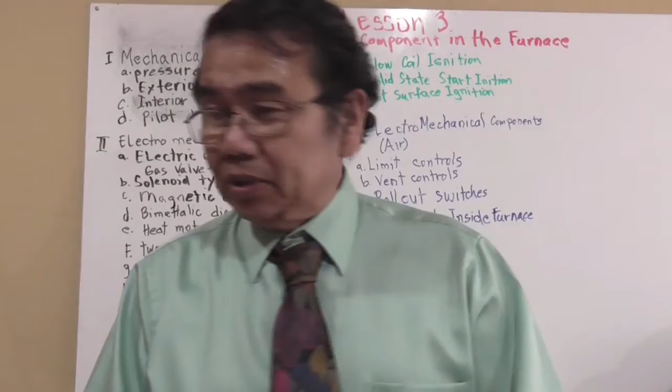Mechanical components: we'll have the pressure regulator, this one right here. Pressure regulator decreases the gas pressure supplied from the utility meter from about 7 inches of water column to 3.5 inches of water column, maintaining a constant gas pressure at the furnace.

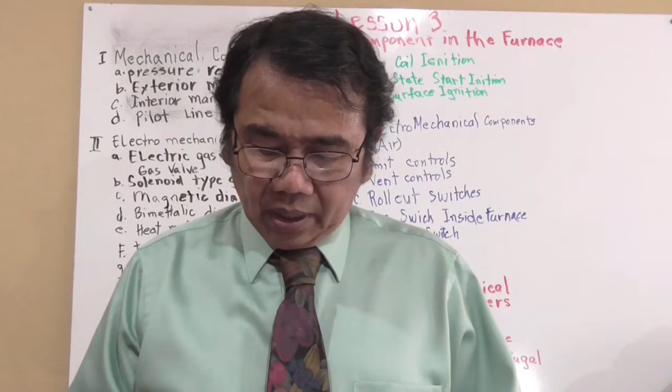Older heating systems had a separate pressure regulator. Newer heating systems have a combination gas valve which has the pressure regulator in one housing with the main valve.

A vent opening is needed on the regulator to assure atmospheric pressure on top of the diaphragm. On older pressure regulators, there was a copper tube that runs from the vent opening to the pilot burner. If the diaphragm was ruptured, the gas would burn off at the pilot.

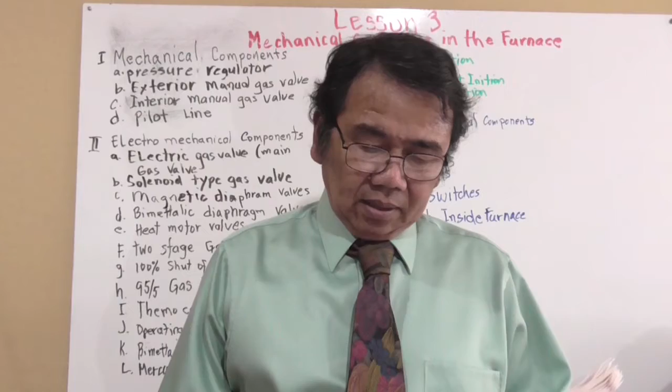On newer pressure regulators, a leak limiting orifice is incorporated in the vent. To change the pressure setting on the regulator, an adjustment screw is used to set the pressure. To increase the pressure, turn the adjustment screw clockwise. To decrease the pressure, turn it counterclockwise.

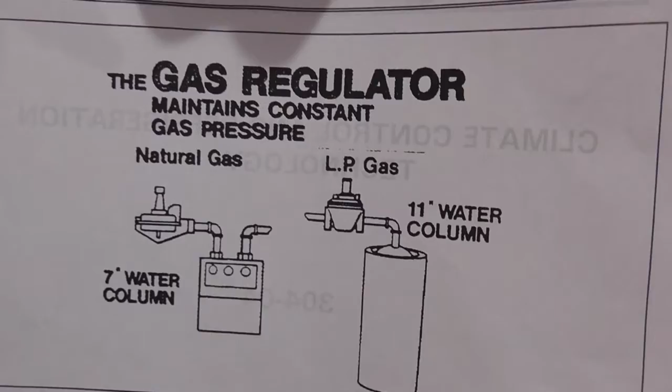I can show you a picture here. One is a gas valve, one is for natural gas and one is for LP gas. This one right here, and this one right here.

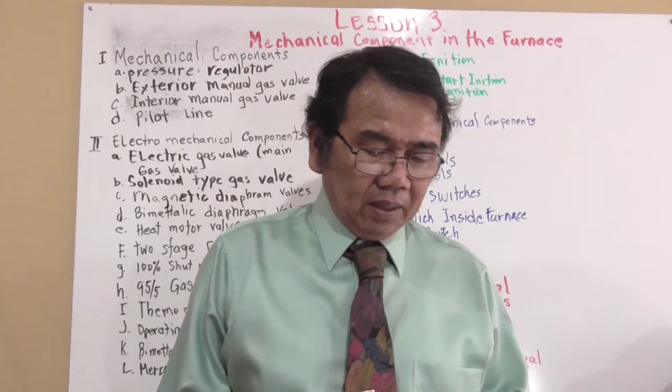Now we'll be talking about the external manual gas valve, also known as the gas safety cock. This valve is open when the handle is parallel to the length of the pipe and closed when the handle is perpendicular to the length of the pipe. Manual gas valves should not be used to regulate the gas supply located outside the furnace cabinet.

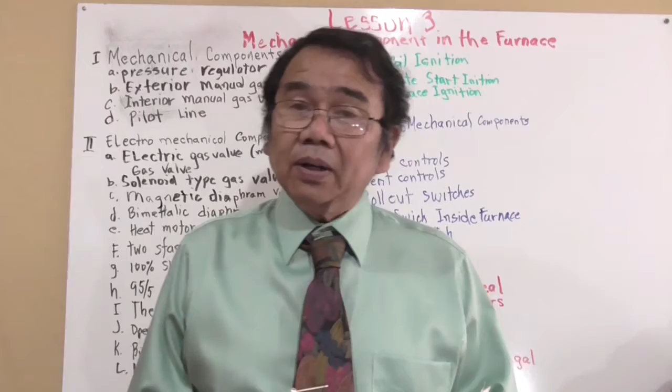The next one we're going to talk about is the interior manual gas valve. Interior manual gas valves - older systems have two manual gas valves. These valves were in addition to the exterior manual gas valve.

The A-cock was used to turn the main gas supply on and off to the main gas valve. The B-cock was used to turn pilot gas supply on and off to the pilot.

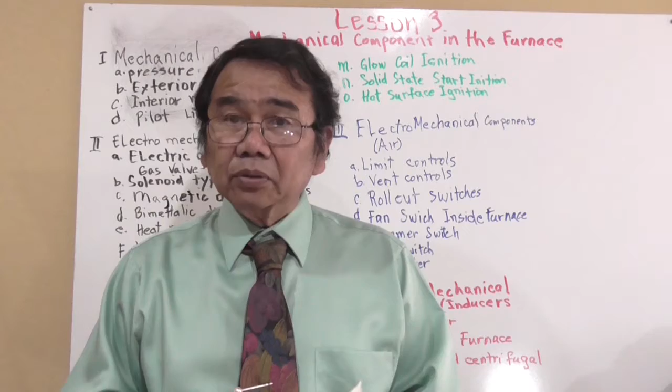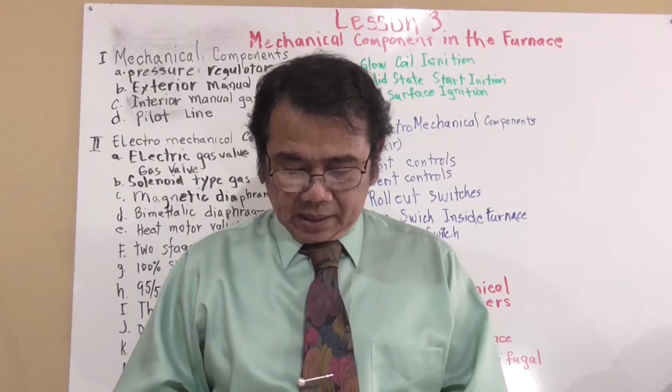One of the several systems is known as 95-5, pilot gas on even if pilot is not lit. That means pilot gas on even if pilot not lit. Pilot auto relight also uses the 95-5 system.

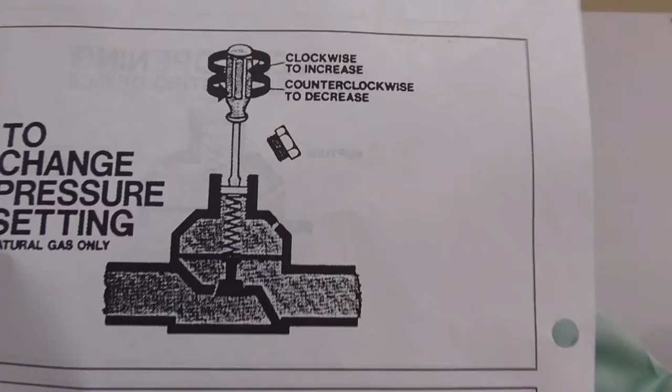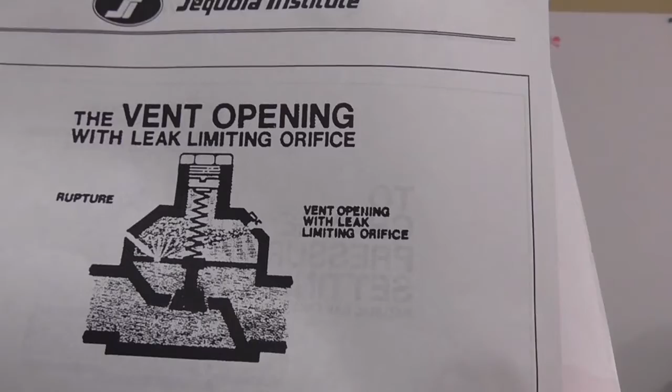In here is a diagram of how you adjust the pressure on the regulator. You've got a screwdriver on top, and then the valve, and then here the gas valve. On the other side is another diagram which shows the adjusting nut on top. Then you have this diagram here.

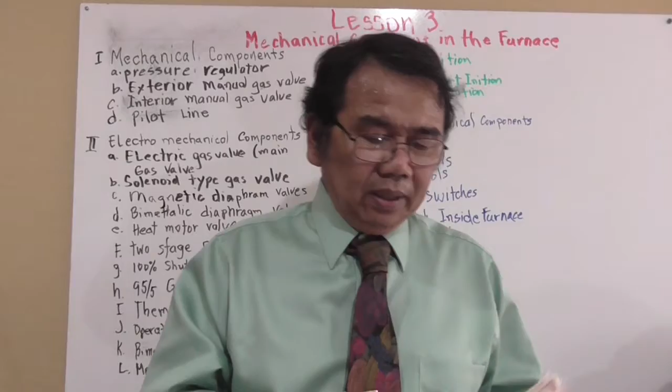Belt drive type is a V belt with adjustable or fixed motor pulley and fixed blower pulley. Belt drive speed adjustment is usually by varying the adjustable motor pulley diameter. That means you determine the pulley diameter of the two pulleys, and then you can change the speed by

calculating that difference. To increase blower speed, close the motor pulley. To decrease the speed, open the motor pulley. Found on many industrial, commercial, and older residential units.

Whenever changing blower speed, be sure to check the amperage draw of the motor. Compare your readings with the motor nameplate amperage rating. This will prevent overloading of the motor.

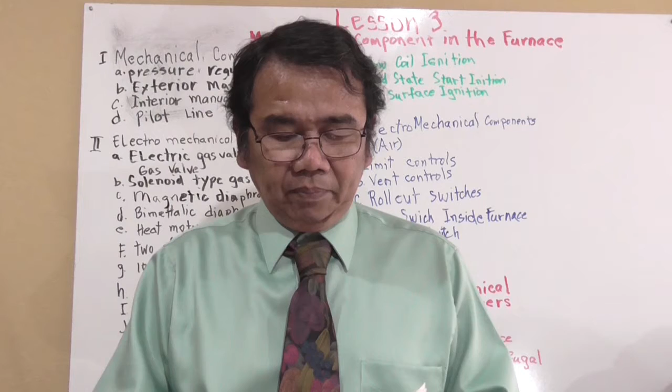And then we have the pilot line. The pilot line is the supply tubing that carries gas to the pilot burner. Tubing is usually 1/4 inch aluminum and is connected with brass compression fittings on both ends.

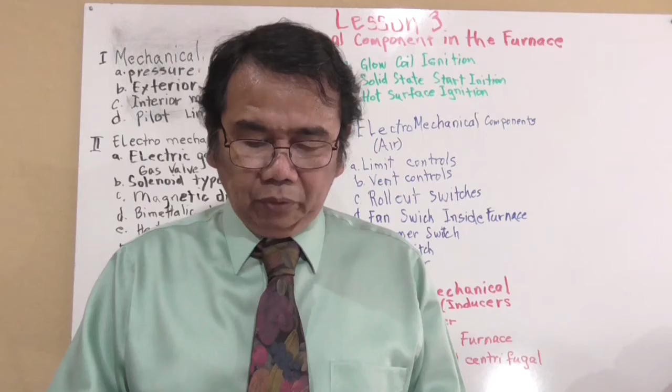Larger systems may use larger pilot lines. Note, use care to avoid cross-threading either the pilot burner or the valve when installing new pilot tubing.

Now we're gonna talk about the electromechanical components. This one right here - first one we talk about will be the electric gas valve. Electric gas valve, which is called the main valve.

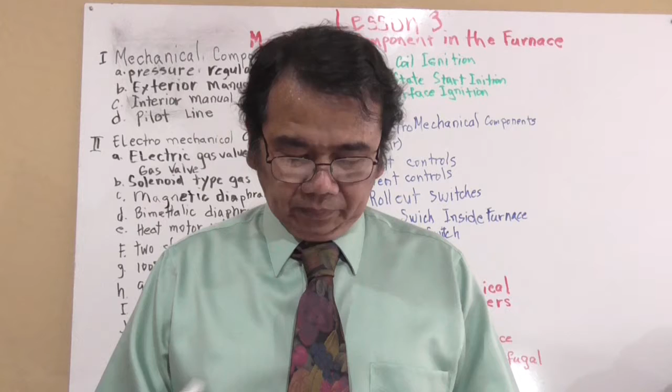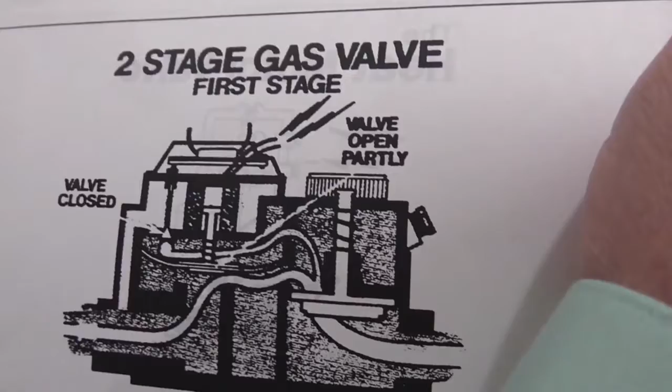This is the way you're going to reset the pilot.

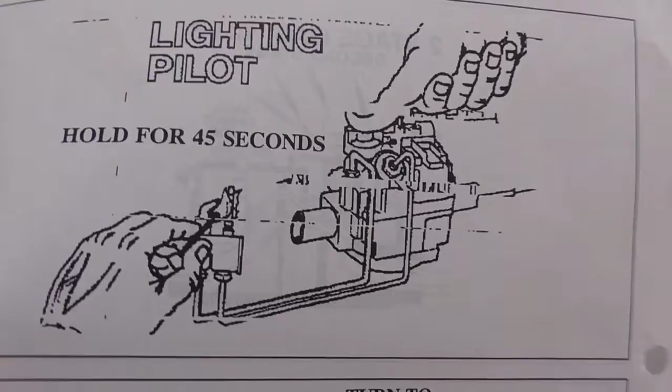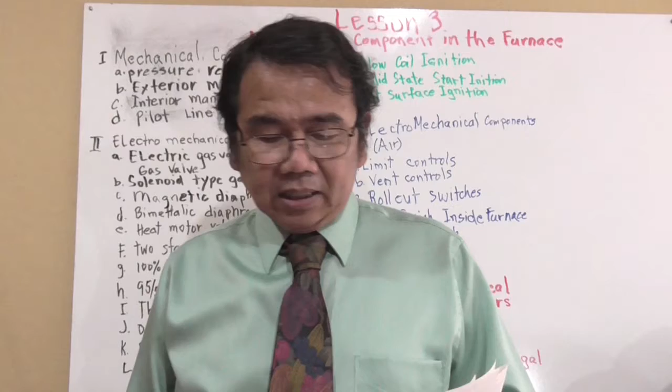Electromechanical components, magnetic diaphragm valves. Two forces must be present to open the magnetic diaphragm valve. The primary force of operation is gas pressure. The secondary force is magnetic - the secondary pressure force is magnetism. When the valve is energized on the call for heat, gas pressure and magnetism are both used to open the valve. Neither force can operate the valve without the other. I showed the diagram for that before.

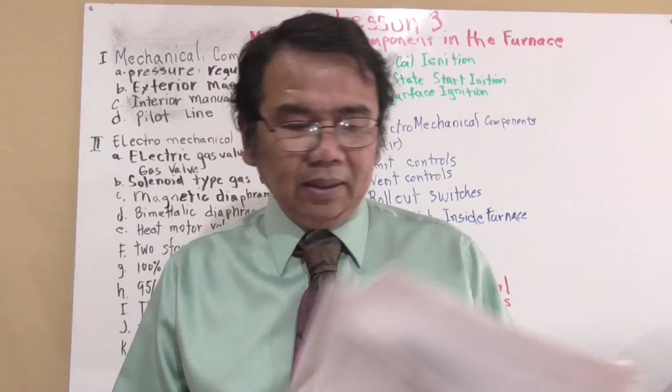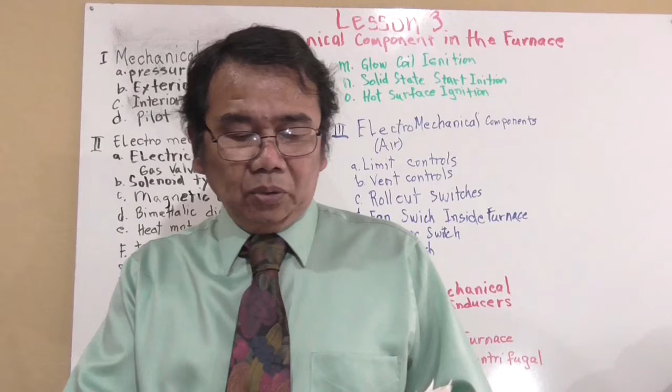Then we've got the other one, bimetal diaphragm valves. A bimetal diaphragm valve is very similar to the magnetic diaphragm valve, except that it uses heat to operate the valve instead of magnetism. A little electric heater, normally 24 volts, is placed on or near the bimetal. When the heater on the bimetal strip is energized, the bimetal will warp and open the valve.

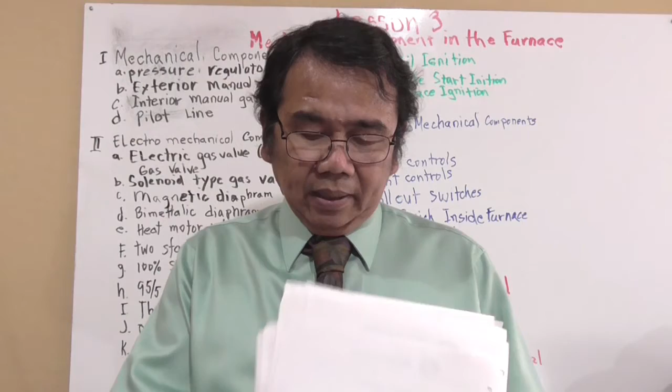This is saying the bimetal works on this principle: you've got a metal inside, and when it's heated up, it bends.

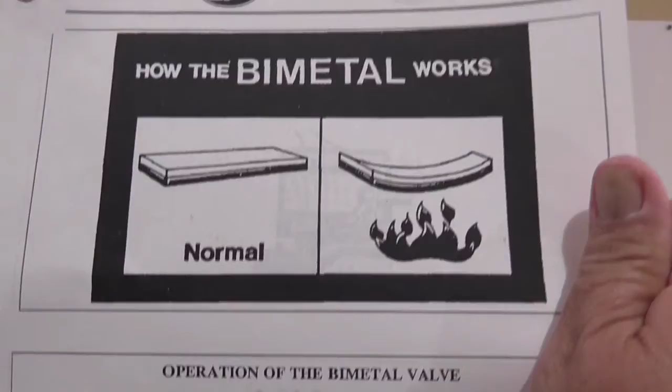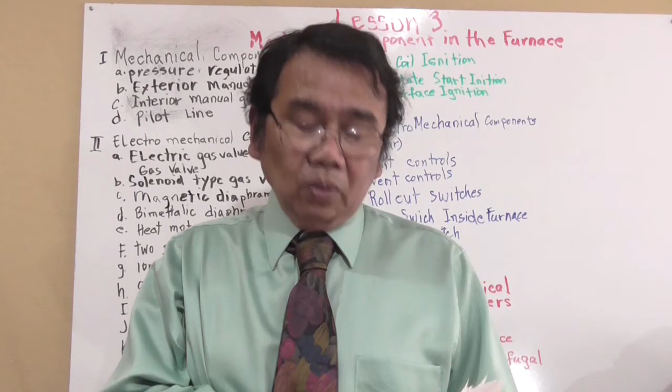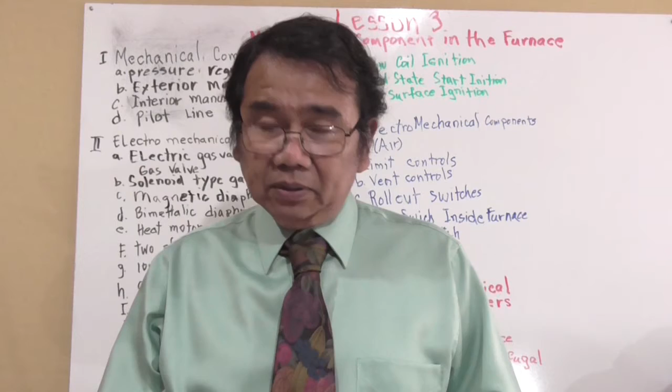When the heater on the bimetal strip is energized, the bimetal will warp and open the valve. When the heater is de-energized, the bimetal will cool and close the valve, because it takes time for the bimetal to heat up and cool down before the valve is operated. There will be a time delay in a bimetal type of valve. Remember, time delay - the delay in a bimetal valve is usually about 15 to 20 seconds.

One disadvantage of the time delay style valves is if there is a delayed ignition, there is no way to electrically shut down the main valve immediately. If delayed ignition is about to occur, shut down the gas safety cock outside the furnace cabinet.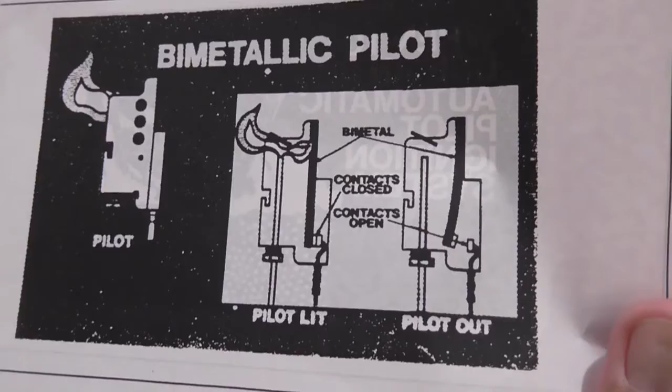This is the pilot diagram that I have here. That's what the pilot looks like.

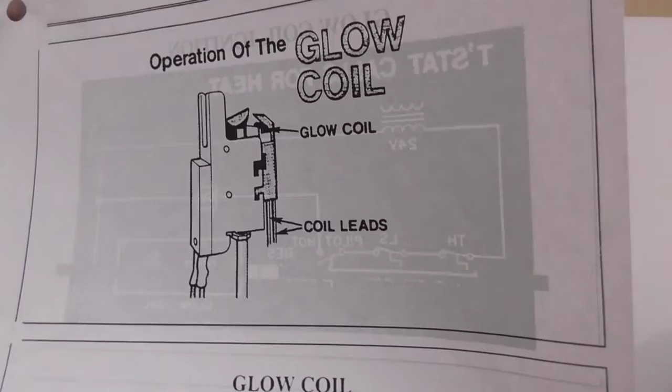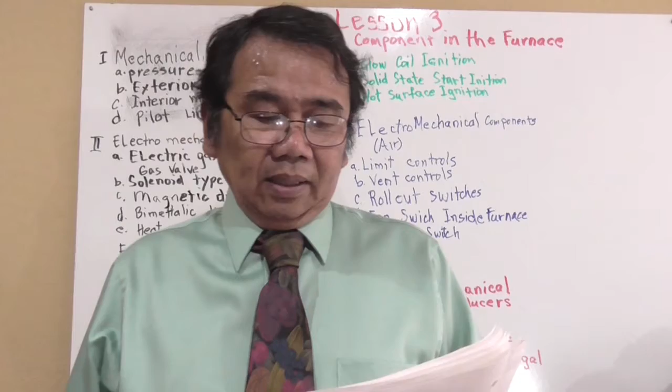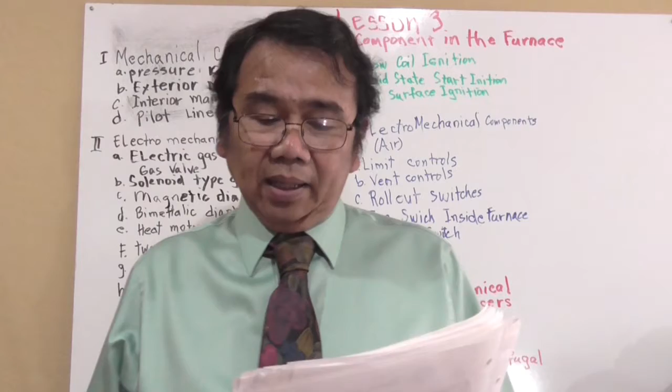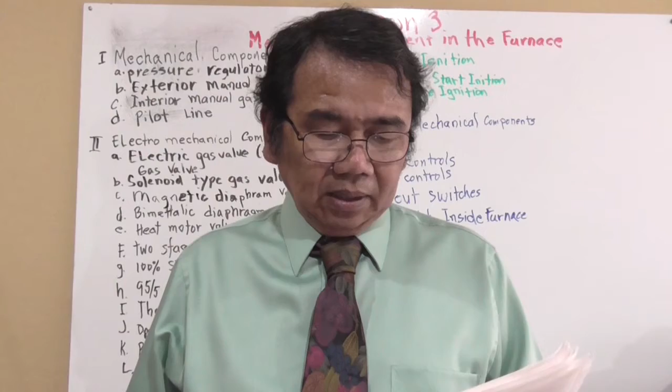Heat motor valve: the heat motor valve uses an electric heating coil to heat and move an expandable rod. The movement of the rod provides the force necessary to operate the valve. When the valve is energized, gas begins to flow through the valve in about 20 seconds. When the valve is de-energized, there is a delay of approximately 40 seconds in closing. Due to this 40 second delay time to close the valve once de-energized, this type of valve is very dangerous if there is a delayed ignition problem present.

If delayed ignition is about to occur, shut off the gas safety cock outside the furnace.

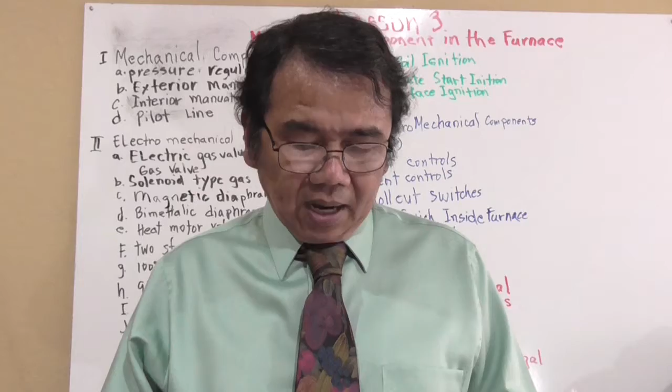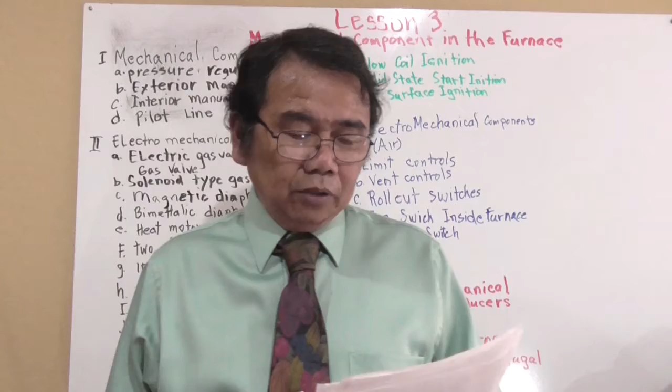And then we've got the two-stage gas valve. When two-stage heating is needed, a two-stage gas valve is used, normally on commercial units. When the first stage is energized, the valve opens to the preset low fire position, usually 50% of the normal input. The call for second stage shifts the valve from low fire to high fire at 100% input. Because of the bimetal operation, there is a 10 to 20 second delay between first and second stage heating.

This is not considered a dangerous valve, even though there's a time delay, because delayed ignition is not possible since the first stage is already burning.

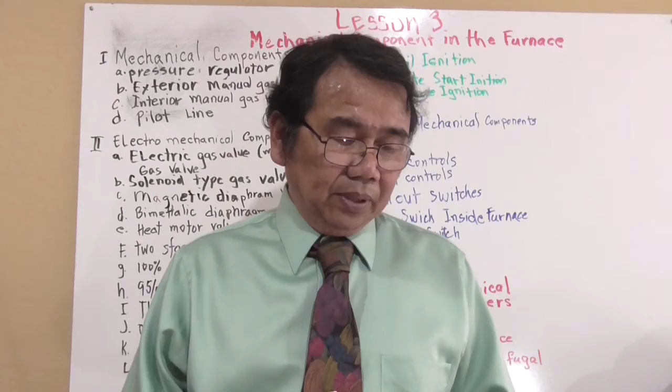Okay, and then we got the 100% shut-off automatic gas valve. This is the 100% shut-off automatic gas valve. Okay, the 100% valve stops gas flow to the burners and pilot in case the pilot goes out. That means the 100% valve stops all gas flow to the burner and pilot in case the pilot goes out. 100% shut-off gas valves are required on all

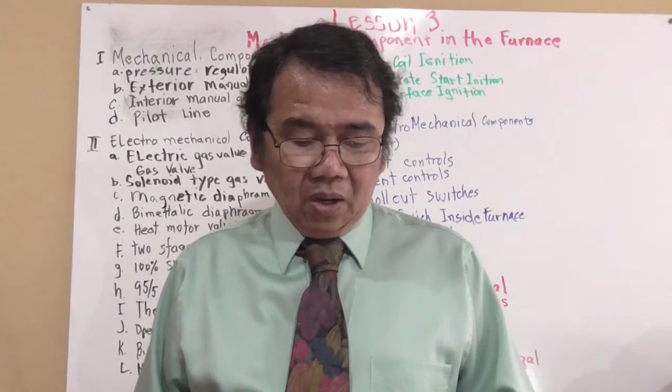LPG furnaces installed indoors. After turning the knob to the pilot position, depress it manually to allow gas to flow to the pilot so it can be manually lit. Once the pilot flame hits the thermocouple approximately 45 seconds, the knob can be released. The pilot flame should remain lit if the thermocouple is in good condition, installed properly, the pilot flame is correct, and the pilot safety coil has not failed.

The millivolt current actuates the internal magnetic safety unit which holds the pilot safety valve open. The pilot safety valve must be open before the gas will flow to the main burner. When the pilot stays lit, the knob can be turned to the on position. With the knob in the on position, the pilot gas continues to flow to the pilot and main gas can now flow to the burners.

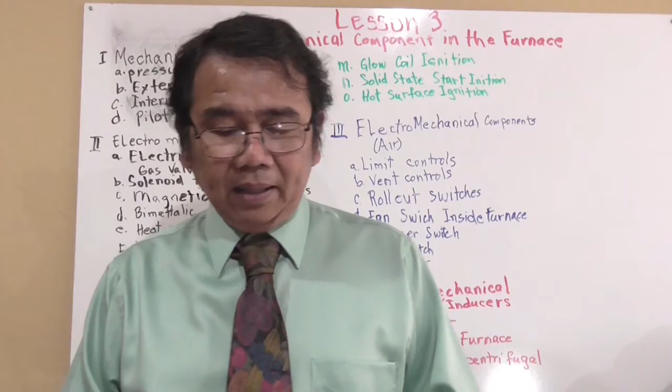When the valve is energized electrically, if the pilot should go out, the safety will drop out in approximately 60 seconds, closing the valve. And then the gas valve will not open again until the safety valve is reopened by lighting the pilot. Manual light 100% safety valves are used mostly on residential furnaces.

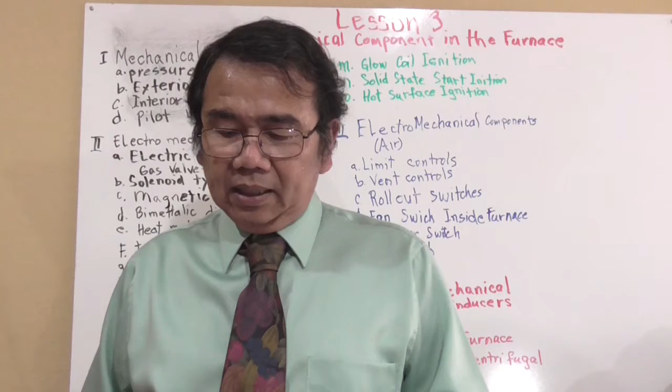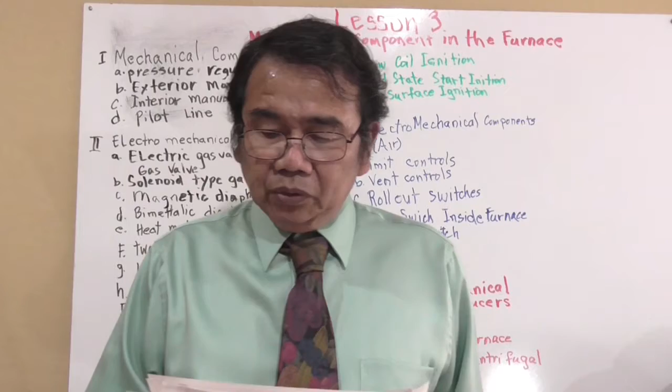And then we have the 95-5 gas valve. The only difference between the 100% shut-off valve and the 95-5 valve is the 95-5 valve has no internal pilot safety valve. Remember, it has no internal pilot safety valve. When the knob on the valve is turned to pilot, gas flows to the pilot without depressing the knob. To assure that the main gas valve does not open until the pilot is lit, a pilot safety switch is usually wired in series with the gas valve in the electrical circuit.

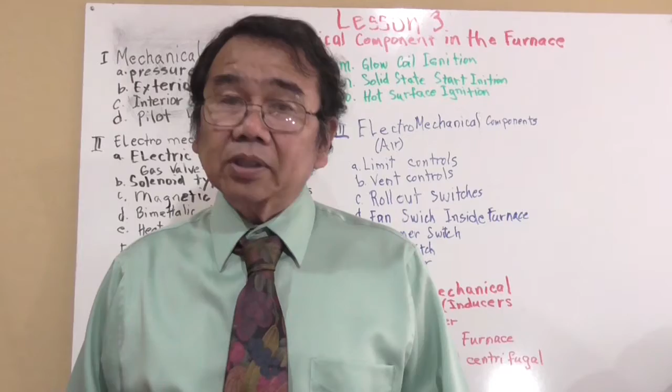When the knob is turned to the on position, gas will flow to the main burner whenever it is energized electrically. 95-5 valves are used on both residential and commercial applications. If found on residential equipment and it is defective, it must be replaced with a 100% safety valve.

95-5 valves are used on commercial equipment where automatic pilot ignition is wanted. If the pilot flame goes out, gas still flows to the pilot to reignite when the glow coil or spark ignition recycles. Operation of 100%.

Now let's go back to this one right here. We got a thermocouple pilot. Thermocouple pilots: the thermocouple generates electricity as long as the tip is heated by the pilot flame. 3/8 to 1/2 inch of the thermocouple should be in the pilot flame. Remember, 3/8 to 1/2 inch of the thermocouple should be in the pilot flame. The electricity generated by the thermocouple energizes the electromagnet which holds the valve open. If the pilot flame goes out, electricity is no longer generated and the pilot valve closes.